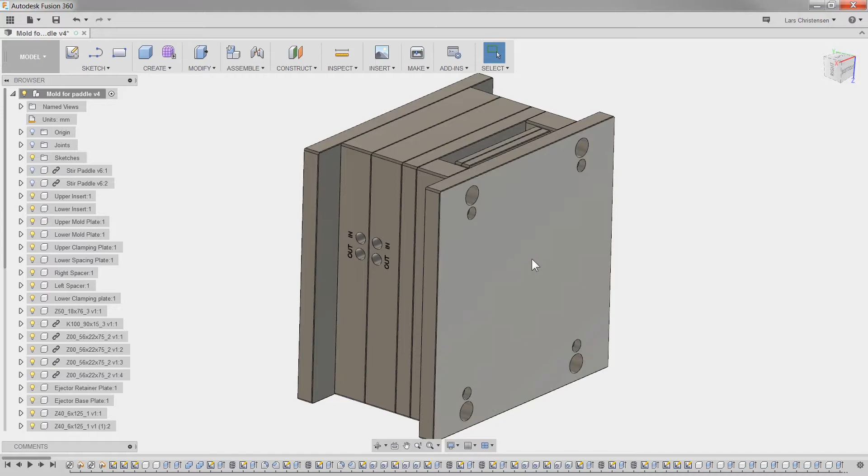And what we have to do now is we have to add the rest of the hardware. Like I said, most of the stuff that I'm using is from Hasco. And then in the end, we also got to get the assembly put together so it can open, close, and we can get the injection plate to kind of go forward and things like that. We're going to have a hole going through the center. So here you can see there's a space here.

So we're going to put a couple of feet in the back here. In Danish, they're called cat paws. And we're going to place those. And then we're going to place the hardware from McMaster-Carr. See, I'm in perspective with auto. Looks weird. And then we're going to place the cat feet, and then we're going to place all the hardware, and then we are going to create the actual movement we need in here. So let's put the cat paws in here.

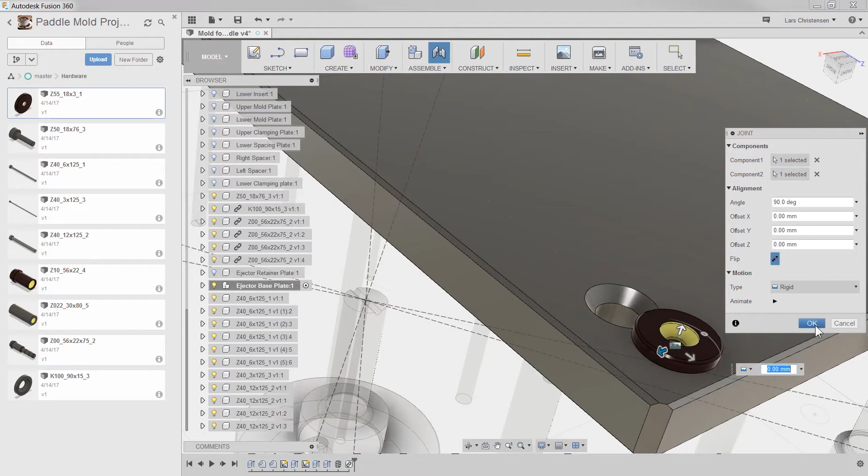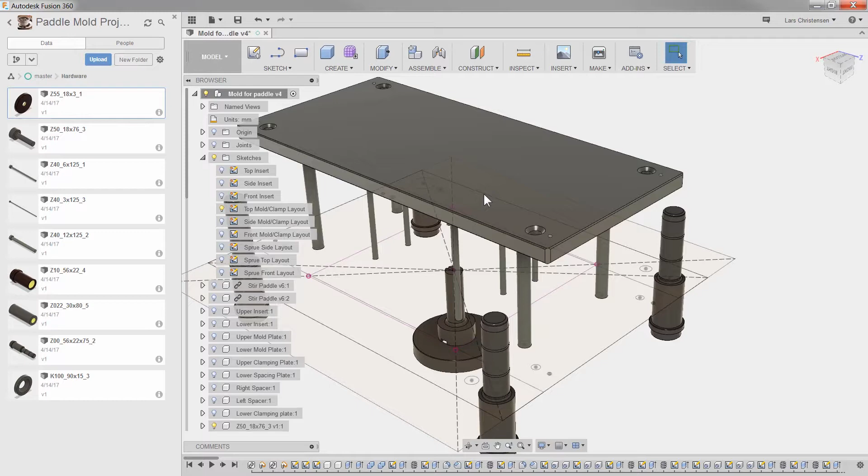Oh, see, I don't like how that is overlapping there. We're going to have to move that over a little bit. Oh, and I did it right into this one too. So that's not good enough. I'm still going to place them all to make my point here. So I'm going to go out, make that active, and insert into current design. And so here's my point: how easily we can move everything.

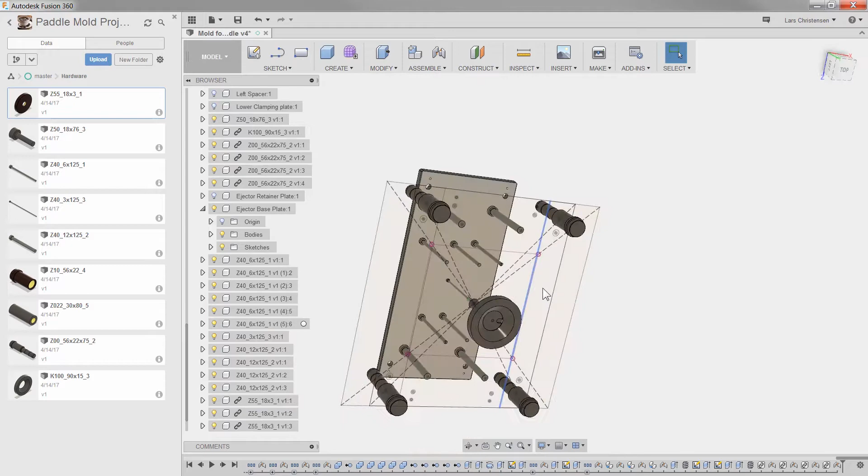So I thought it was a great idea to make these vertical and didn't take into account that these mouse or cat feet, as we call them in Denmark, would be so big in diameter. That's all right. Okay, so clearly this is not what I want. I'm going to move them in a little bit. So we can literally go over to our top plate, go in and say edit sketch. And I decided to make a relationship between these 2 points. So I'm going to abandon that idea. And then I'm going to place a dimension instead.

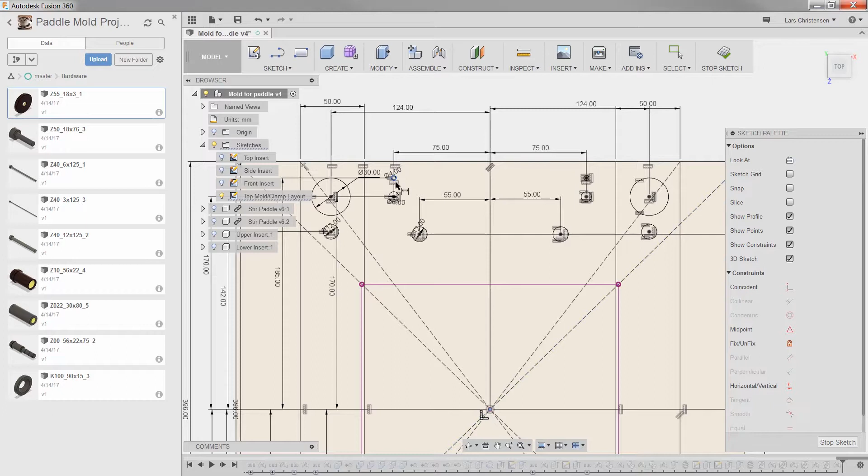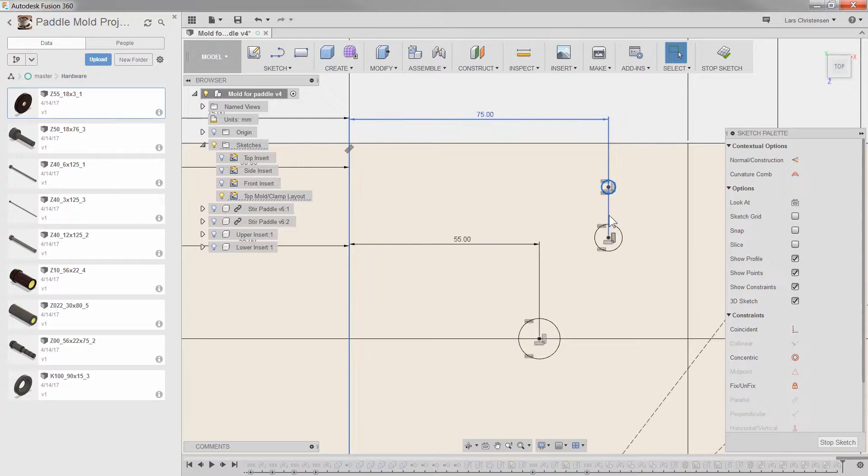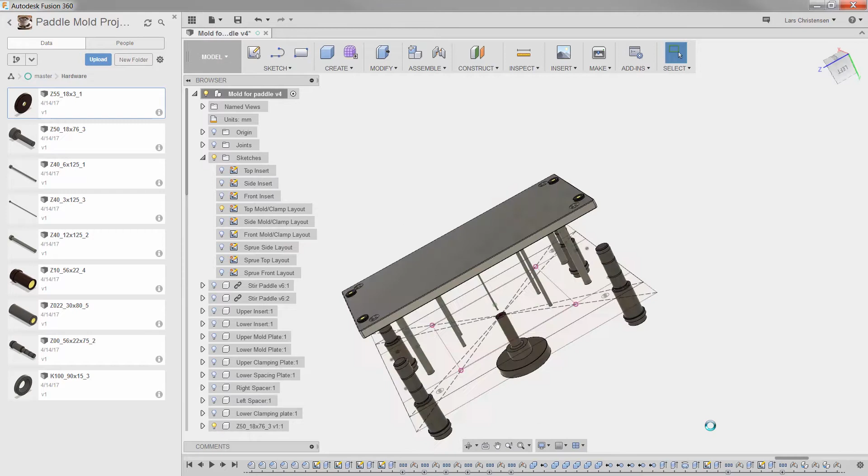So we should place that below. Do the right thing. Let's do it. What does 65 look like? That still might not be good. 60. I like 60. So now I'm just gonna have to go in and kind of fix. Double flag, hit OK. Everything's going to calculate. And if we did it right, now when we go and look at this, we should have moved these over here. So I really hope that this makes a lot of sense.

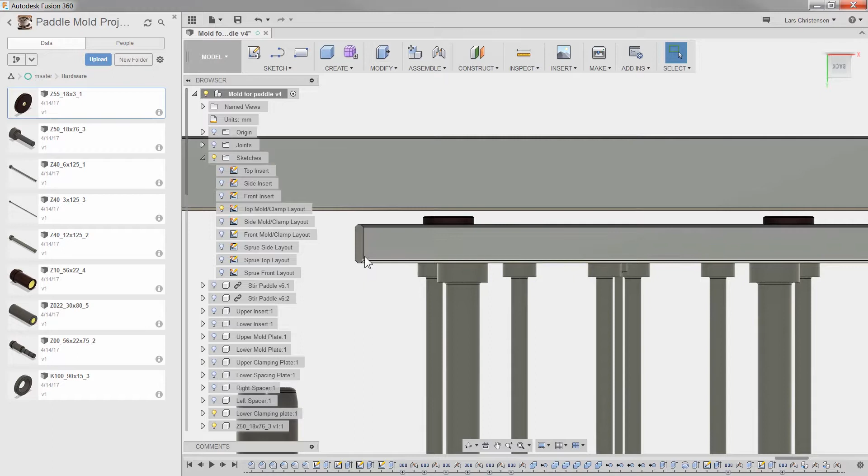Now I want to show another thing that I kind of did on purpose when I created this. If we actually turn on our lower clamping plate, on purpose I actually made a 5mm space here, but when I went out and got these, I call them cat paws in Danish, I don't really know what the name is, they're actually only 3, which means that I actually want to move this whole ejection down by 2. You could also make the plate thicker, I guess. There's a couple of different options, but this is a typical layout.

If we go in and we look at the front view again here, from the front sketch, let me go ahead and edit the sketch. When I drew this ejection up, I actually made it at 5 instead of 3, because that's what the cat feet are. So if I go ahead and change this to 3, you say to yourself, well, what happened? Well, everything stayed in here now. So let's hit stop. Now change that to 3.

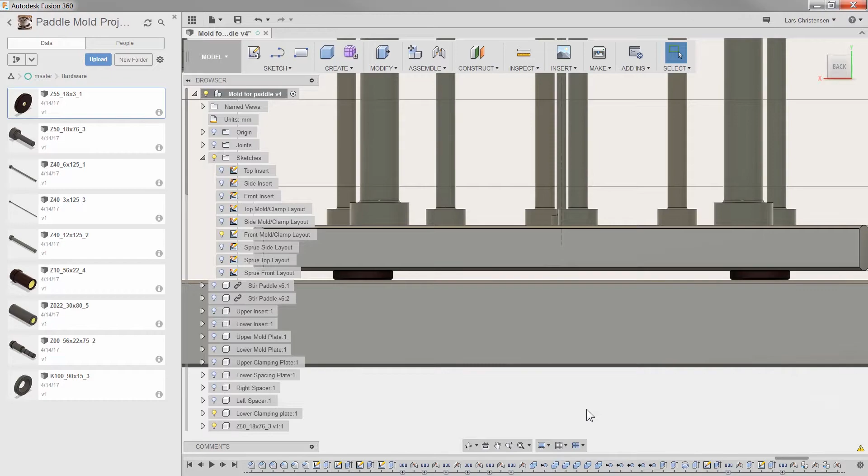And what did that do to everything we have in here? Well, this looks good, but if you just saw down here, we get a warning. There's 2 extrusion features that have failed, right? And this can easily happen. Well, if I choose that this is what I want, I now need to go in and try to solve

some errors in here. Now, what I'm going to do right now is I am just going to go in and make sure that I hide everything here that is not really needed right now. Okay. So we have the backing plate. We have the lower clamping plate. Now, I'm going to turn on the retainer plate. There shouldn't be any errors in there.

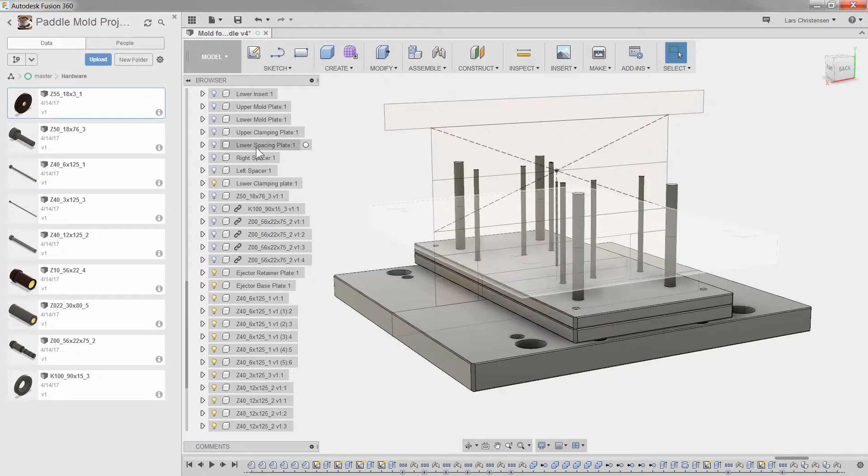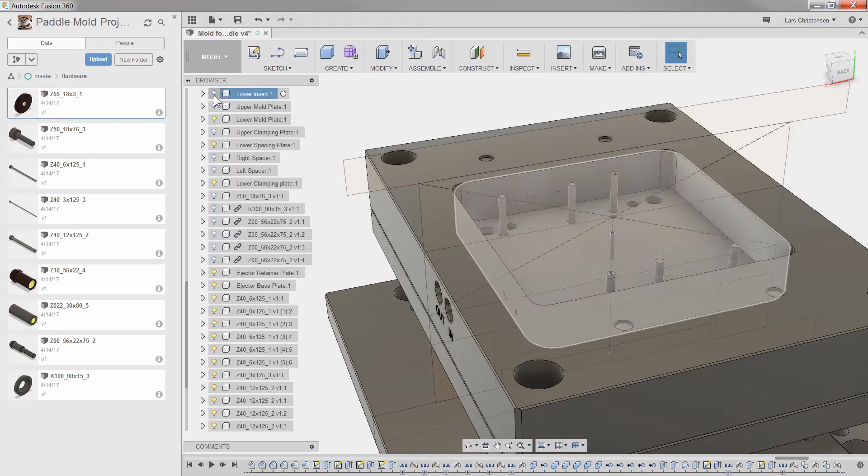Then if we're moving up, we have the lower spacing plate. There shouldn't really be any errors in there either. What happens when we go up to the lower mold plate? Well, here we do have an issue because we moved everything down another 2mm, right? And if we turn on the lower insert, well, that actually stayed. So what moved was the ones we did the direct edit on.

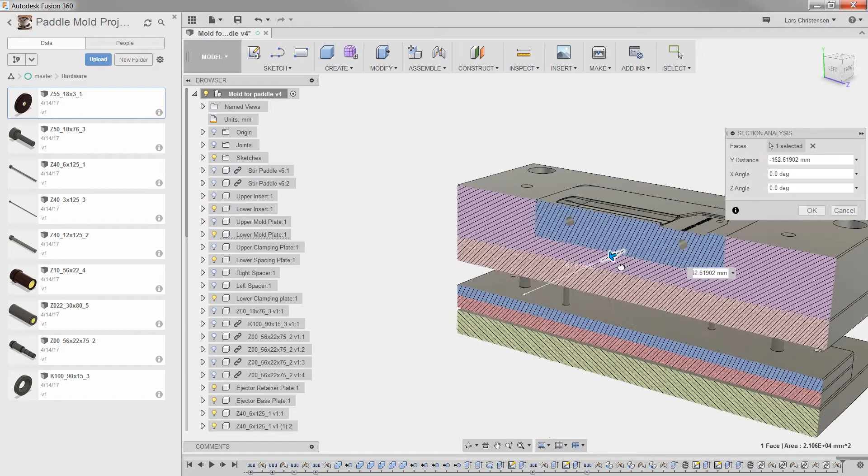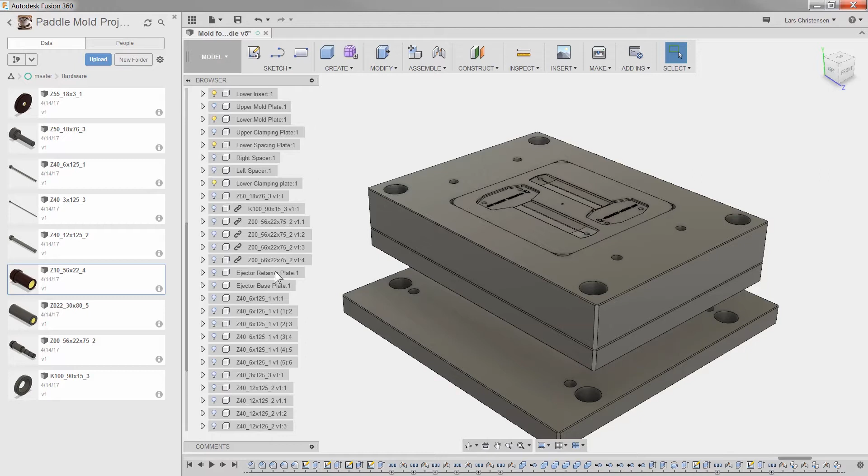Now the last 2 components I'm going to add to this one before I start adding hardware are these bushings and these here. So let's start out by adding these into the design. So I am just going to go ahead and hide all these components here, the lower, and there we go. So we've got to insert these bushings. Insert these into current design.

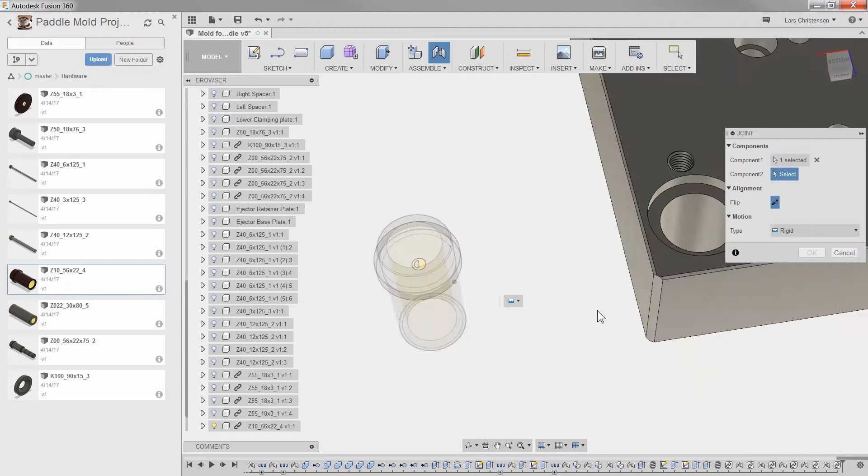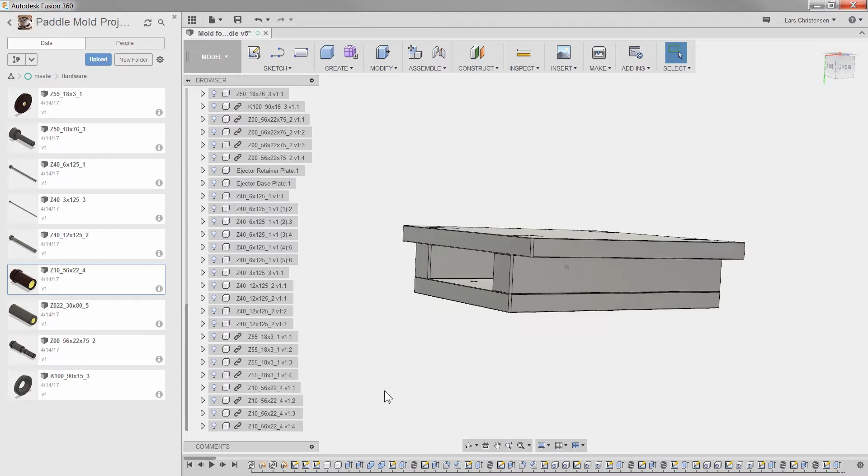So there are those. And again, they will also guide the lower spacing plate right there. And then to guide the right and the left spacer, oh, we never got the holes through the right and the left spacer. So to put the last spacers in here, we're going to use these here. So we're going to insert these.

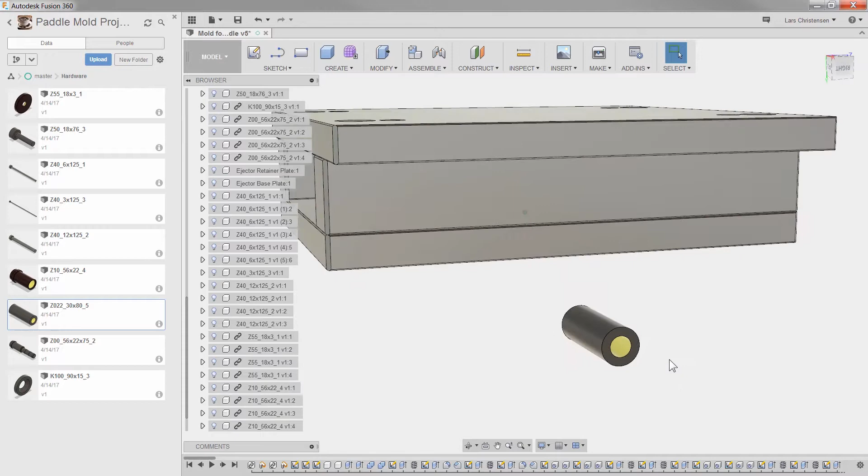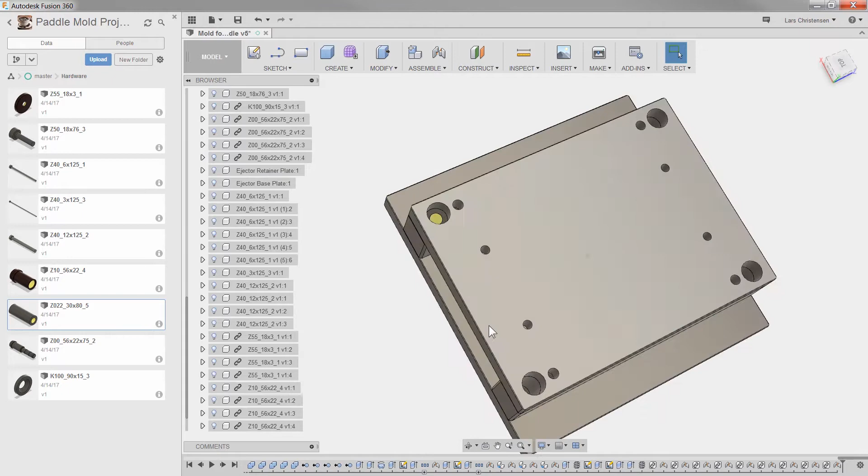These bushings here. I'm just going to place these down. -8. Like that. So they go through this. They should attach right here. Right, so they go right through the edge, through these two plates, and then they go into the lower spacing plates.

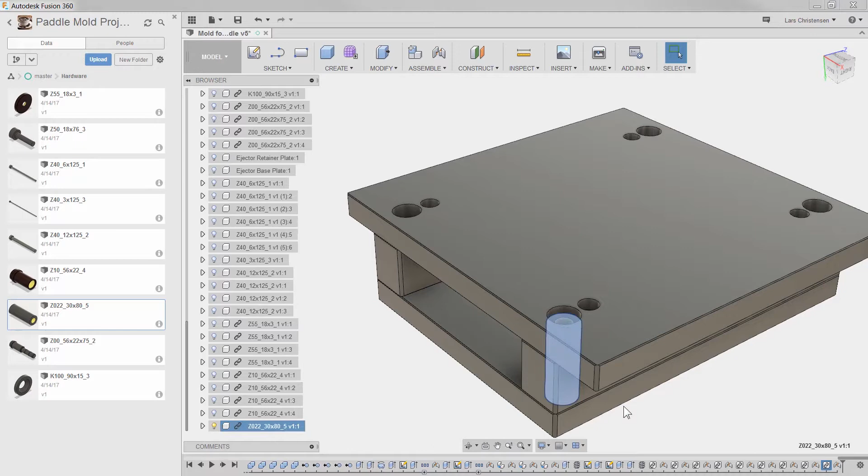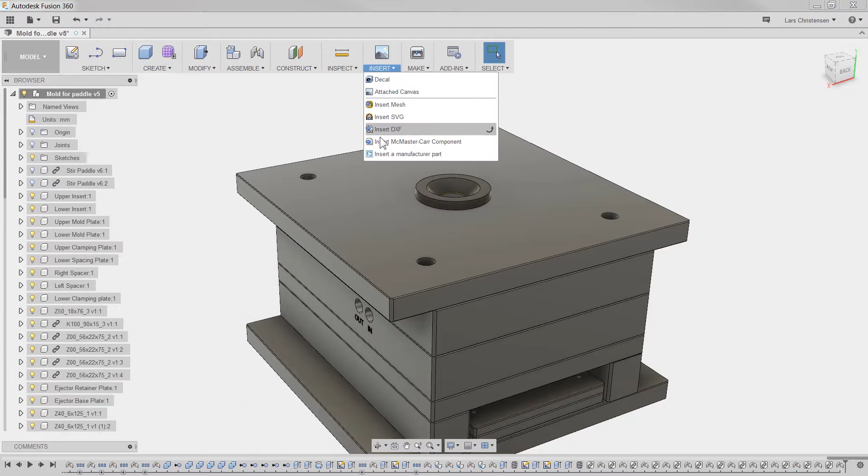So the last thing we're going to do is the hardware, and here I am going to use the McMaster-Carr hardware. It's very easy to do. Go to insert McMaster-Carr, and you get the catalog, and I'm going to say socket head cap screw. It's going to be metric. What is your diameter? Mine are 12, and the first length I'm going to go for here is 45.

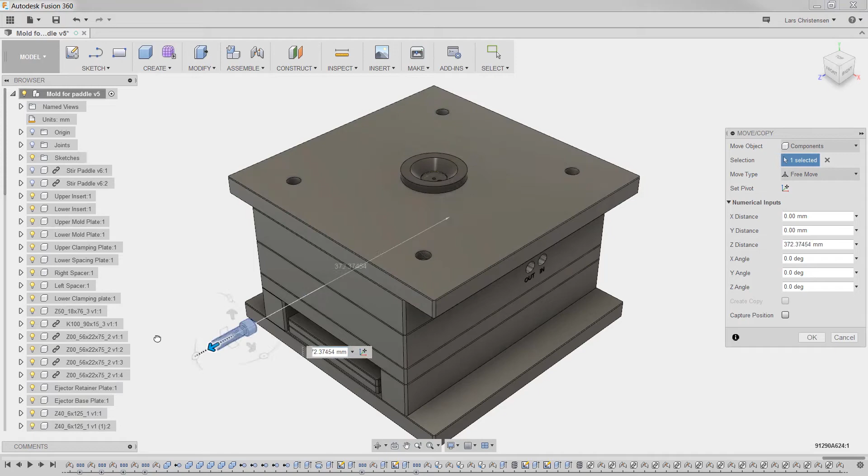Right there. You can actually make this window a little bit bigger. Click on the part number and click product details. And then if you scroll down, you can choose all different kinds of formats. I normally pick the step file right here. Hit save. And that screw is going to be brought right into your component, just like if it was an outside component. And now we can go ahead and do the same thing as we've been doing all along to place these.

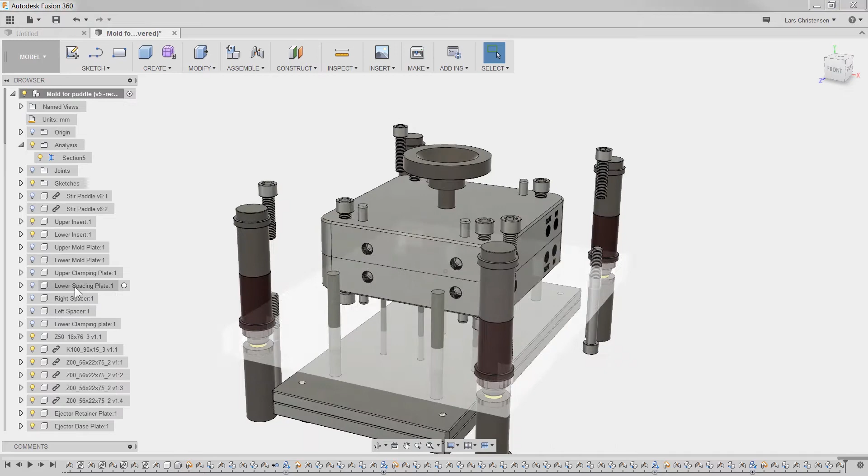Now look at this. This is not good. So what we can see here when I did my section analysis is that one of my ejector pins actually cuts right through the mold. So we're going to have to either move the ejector pin or move the coolant channel. Now the easiest thing is probably to move this coolant channel over here on this side.

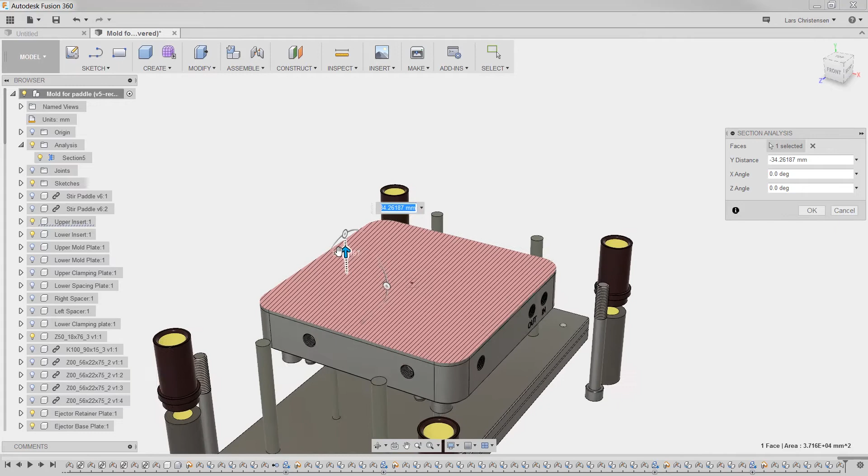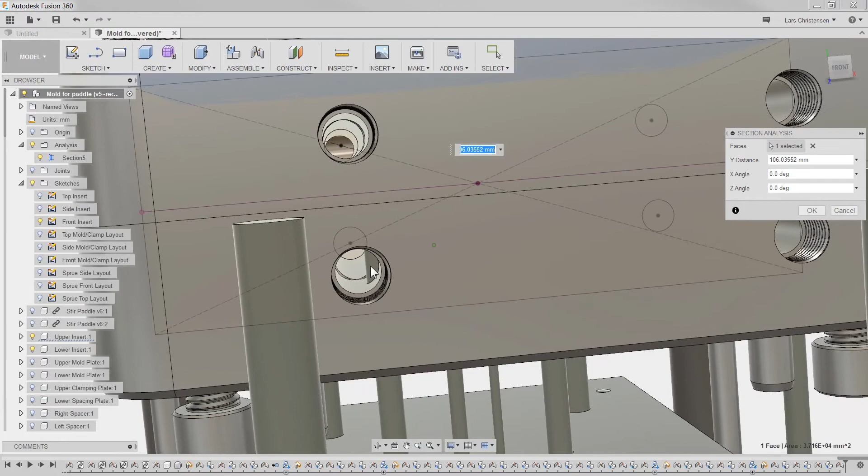So I'm just going to hover over here and see that if I go into my sketches, and this would be our front insert, we have these coolant lines sitting over here, and we can see the ejector pin is actually cutting right through there. That's not good, right? So let's go into our insert sketch. We'll get out of the section analysis. Go to our front insert sketch, edit the sketch.

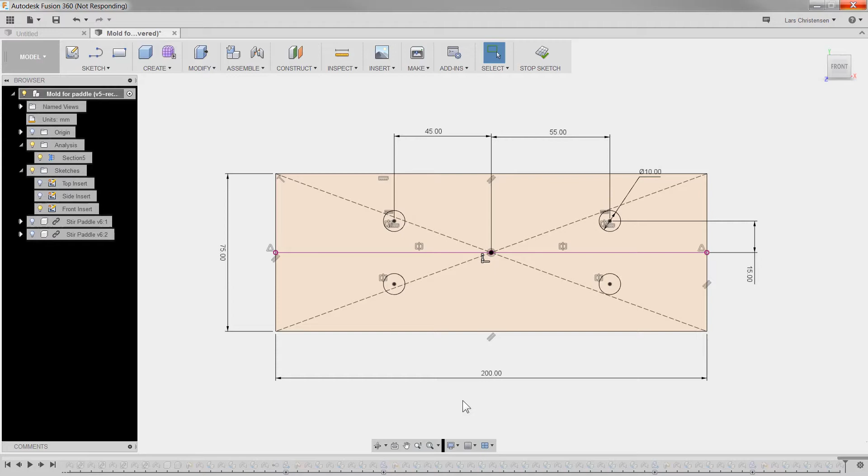And I think what I'm going to do is try to move this one over just 5 millimeters and see how it looks then. Stop sketch. We're going to do all our calculations. And I do another section analysis,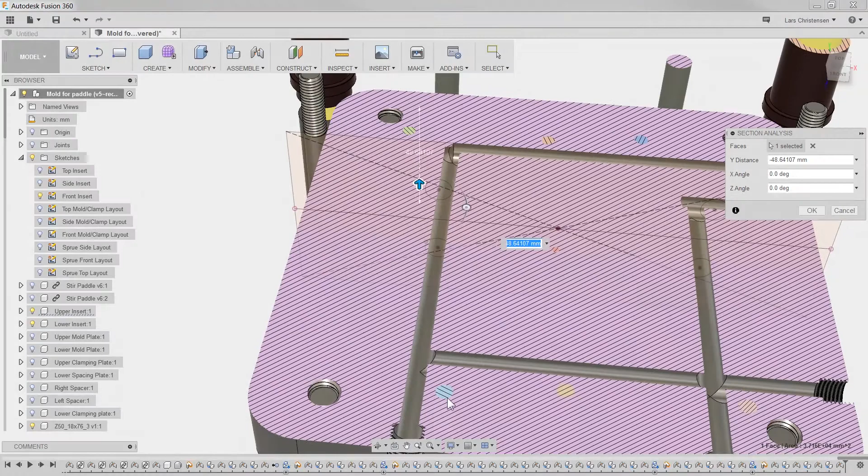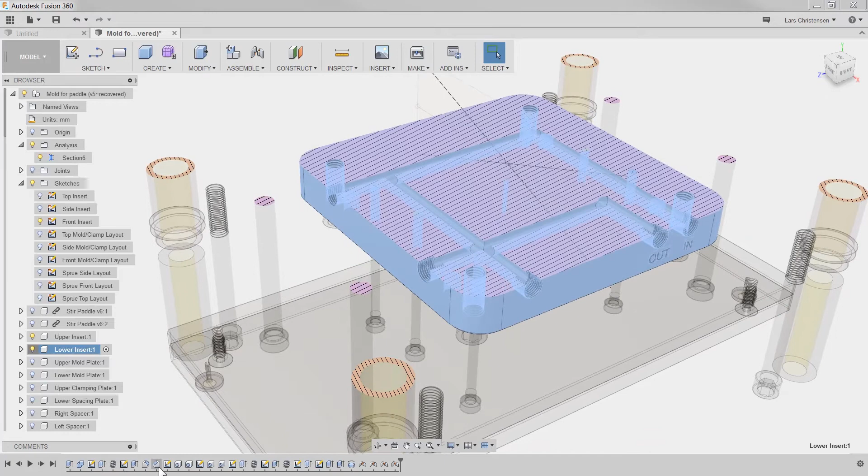it looks like we're now clear of the ejector pin, but it might mean that this hole here should be a little bit deeper on that lower insert right here. So if we go into that one and make it active, we can find that hole, right? By clicking in here, we can see that it is these holes here. So I'm going to edit that. And I'm going to make the depth 150.

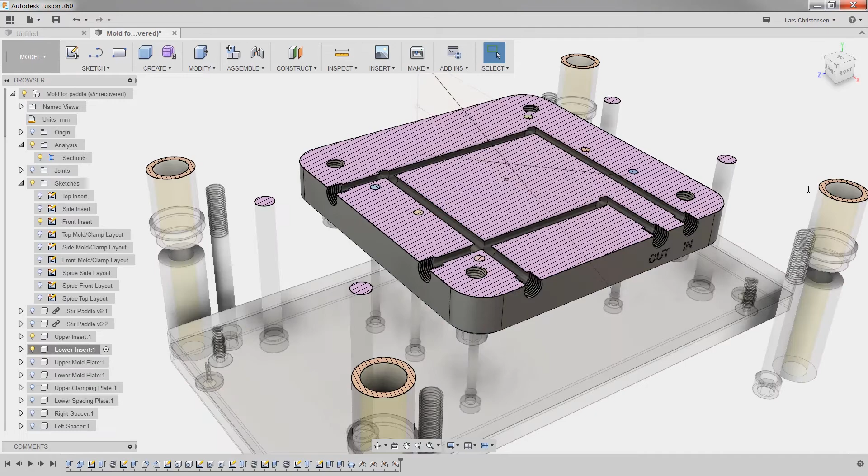And let the software do its calculations. And now we're making sure that these go down here and that the locating pins are not touching our coolant holes. So I hope that this is helpful in regards to using this section analysis tool to troubleshoot through here and making sure that we're not hitting anything.

Now there's a couple more things I just wanted to show you quickly here, so I'm turning everything back on. And one of them is the selection tools we can create in here. I didn't use this when I was working with this model. It could make life a lot easier when you start creating them. What we can do is actually create selection sets.

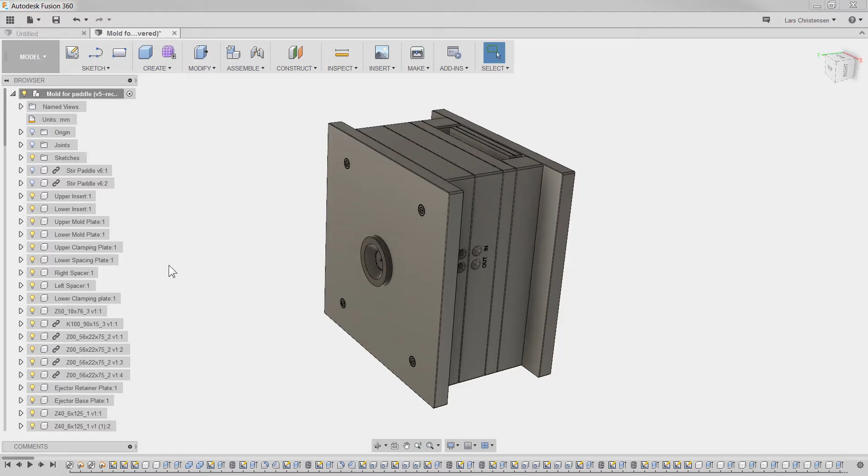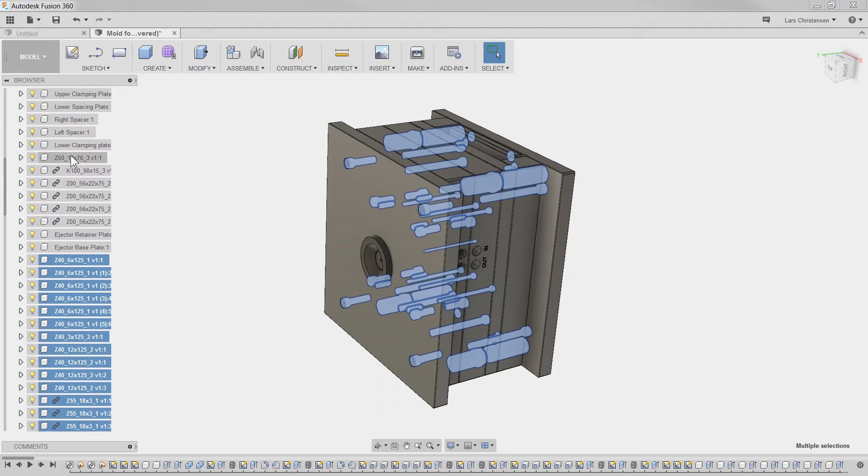And what selection sets means is that we can take all the hardware, for example. If I select all this hardware here, and then we have these retainers and everything else, let's do all this, and down to the bottom is all hardware. And then also these 4 pieces here. And if I right click, I can say create selection set.

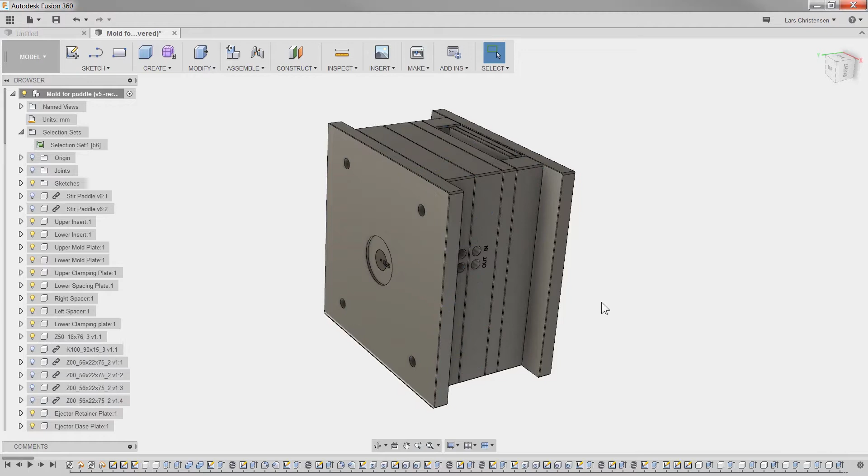And when I do that, up at the top I now have a folder called selection sets, and I can now click right here and select it all, and now I can hit V, and I have now hidden all the hardware in here. I can also go over here and turn them all on again.

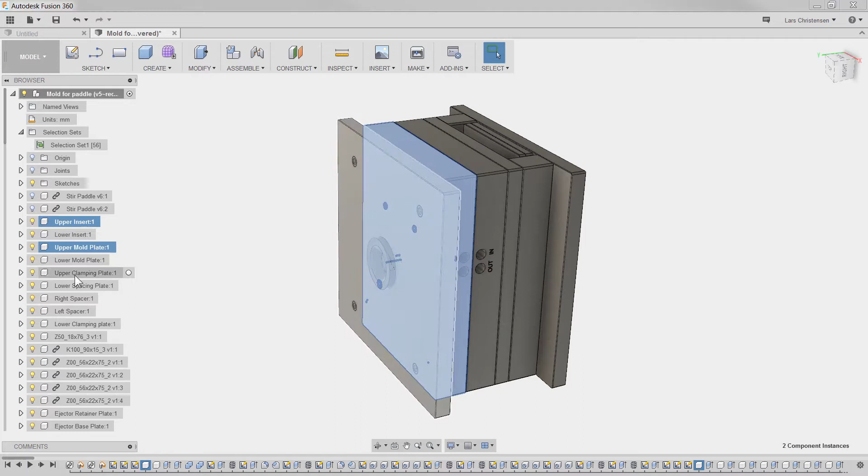And then you could also do something like creating an upper and a lower half, for example. So if I turn on the upper insert, the upper mold plate, and the upper clamping plate, I can right click on those and say create selection set. So now this will be created, and you can rename these. So I can call this upper.

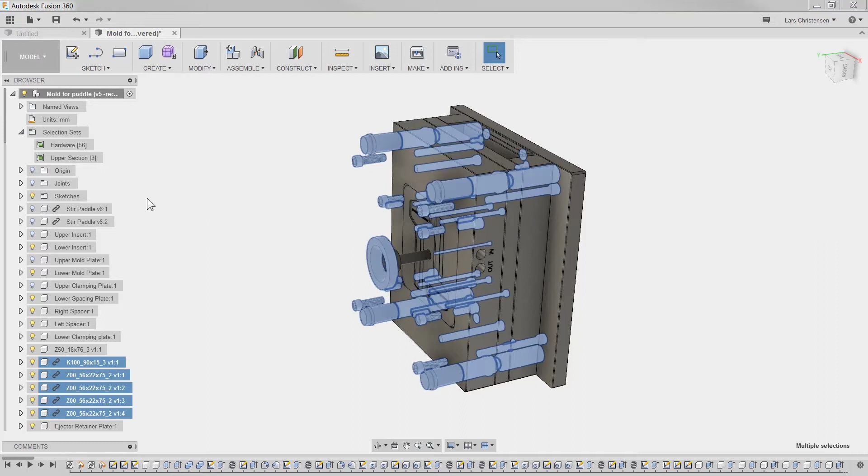And we'll call this hardware. So now I can select all these, and I could now hide them or unhide them depending on what I want to use. Oh, I didn't include one component in there. So that selection set can be handy. It's not something that I'm using that much, as you saw, but I wanted to show you this.

Now the next thing that is very important to talk a little bit about is that right now everything is still moving around. All these components have not been nailed down in space, and I'm waiting to do this to the end actually. So definitely watch my assembly video if you want to get all this nailed down. I'm gonna make one component ground.

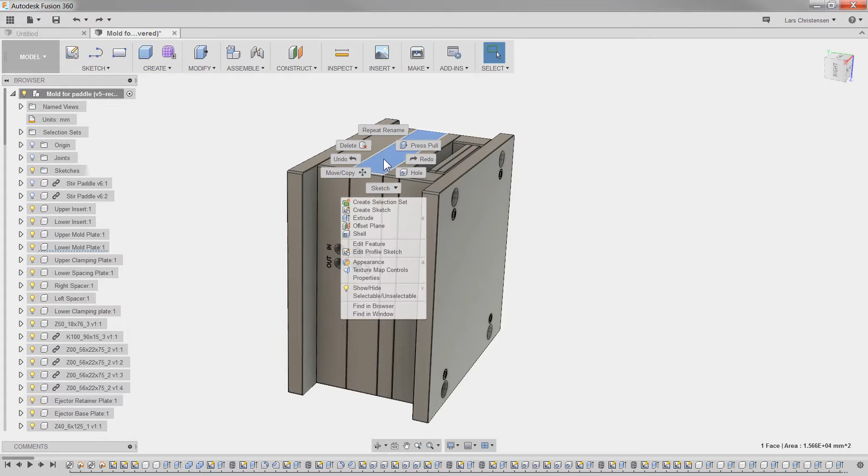I'm actually gonna choose to make this component here the ground component. So that will be my lower mold plate. I'm gonna right click and ground that one. Then I'm gonna go back to the upper and create a selection set for the upper one.

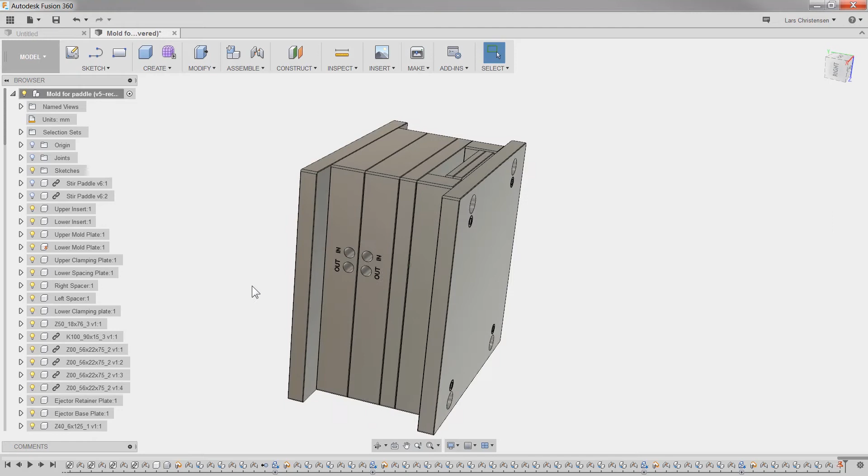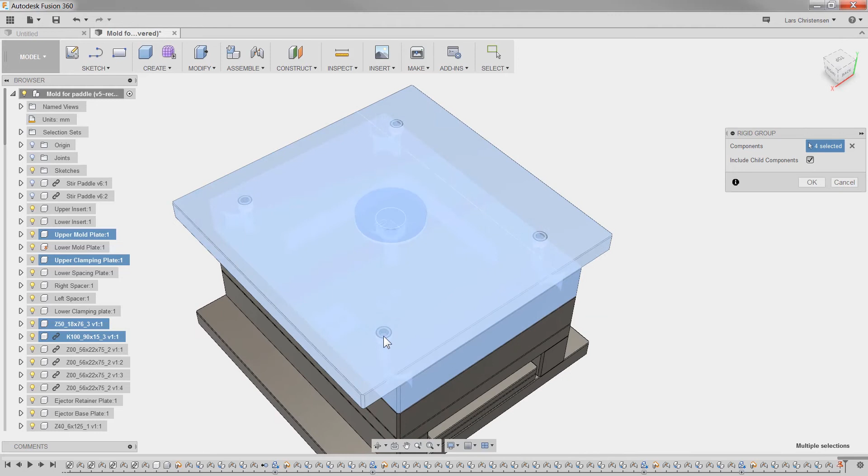Now I can go in here to assemble and say rigid group, and I'm gonna now group all the components together that are in our upper selection. And that is also going to include the upper insert, and it should also include all the children.

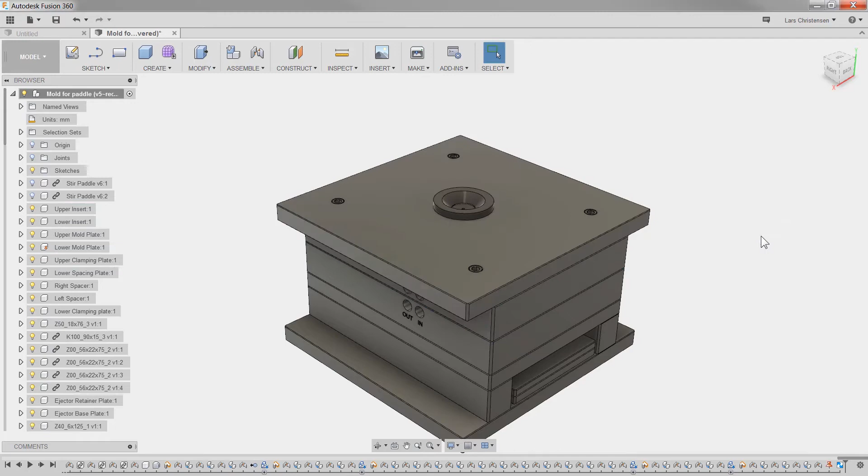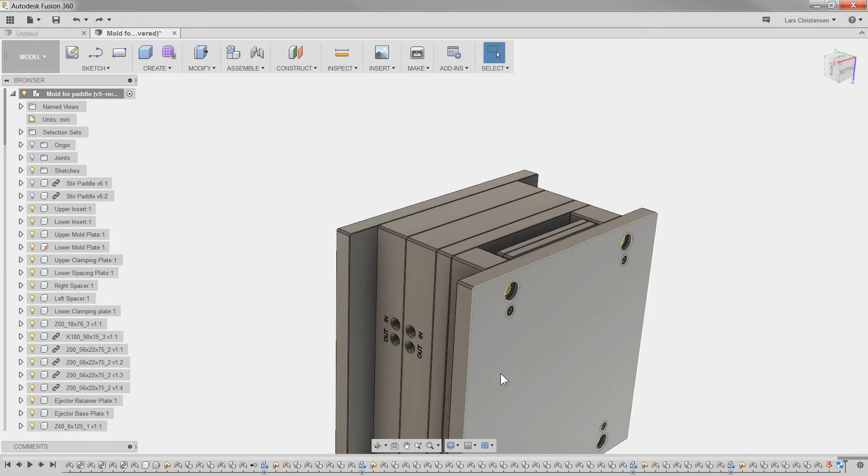So now that means that this can move together like this. All this can now move around like this. I'm going to go Ctrl+Z to get it back. So what I want to do is create a relationship between the ground component and this one,

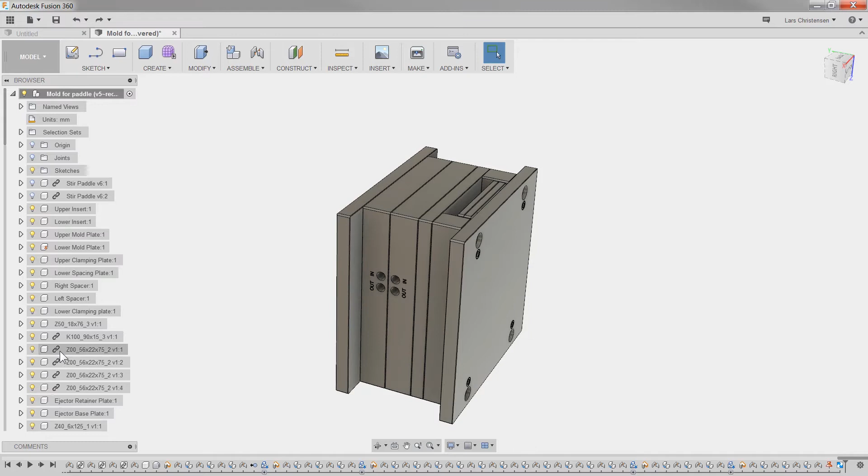so we get the relationship we want. So I'm going to bring it back in where it was, and I'm actually just going to cheat here by turning off the lower clamping plate. I'm going to turn off the spacer and this one right here.

I'm going to use the command called as-built joint. Watch some of my other content to put this all together; I'm not going to explain it all here. I'll take the pin and select it as a component, then select this bushing that belongs to the other part, and make a slider relationship between the two.

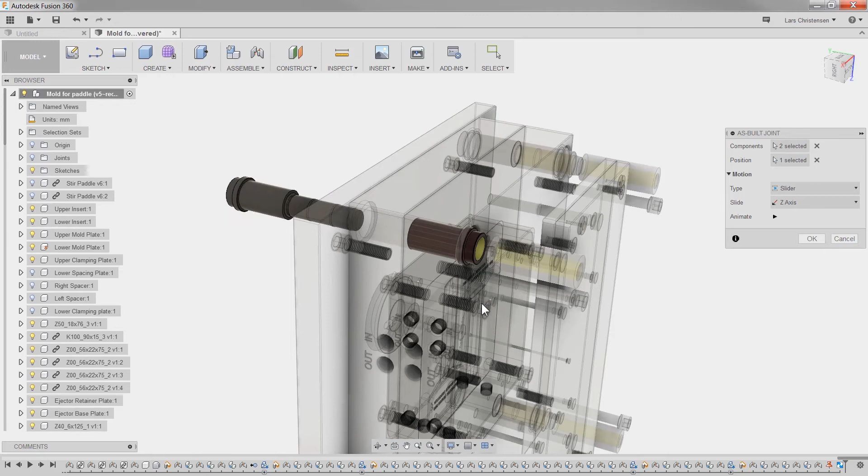So now you can actually slide back and forth like this. I'm going to hit OK. So now we have the sliding action of the upper part between these two.

Now I can go over to that joint and find it down here in the bottom. That is that sliding joint right there. If I right click on it, I can say edit joint limit. Now I can say the minimum is 0, and the maximum I want it to move is, just making a number, 100 millimeters.

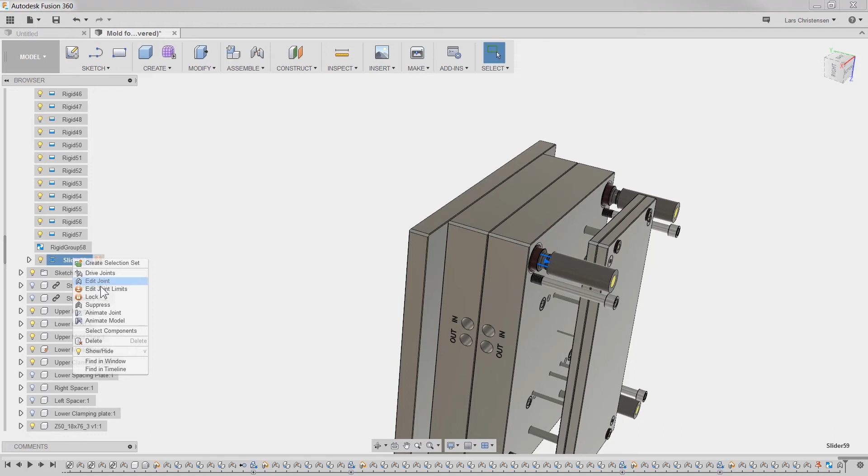So now this thing will move like this. That is good. Now we need to select and make a rigid group for the remaining components.

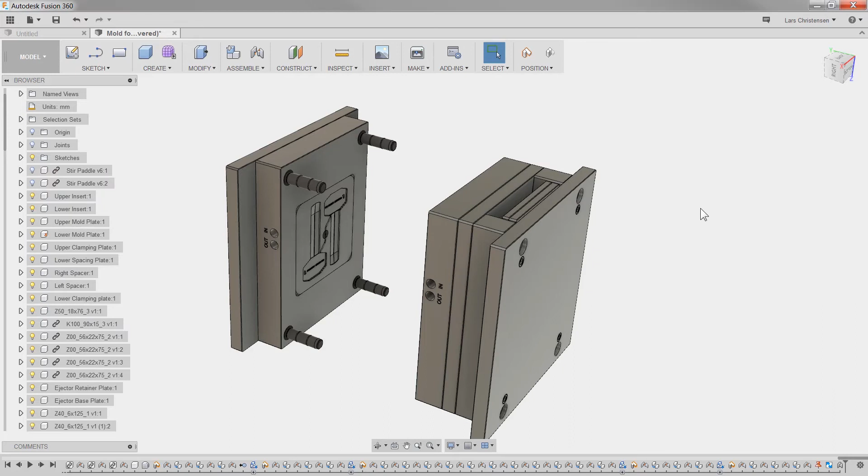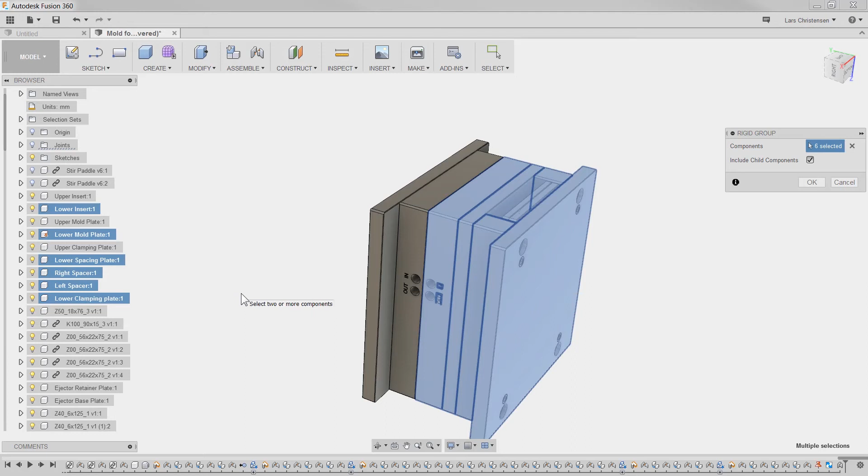The remaining components are going to be the lower insert, the lower spacing plate, the right and left spacer, and the clamping plate. They are all going to be grouped with all their child components. Then the last one we need to do is the ejector plate.

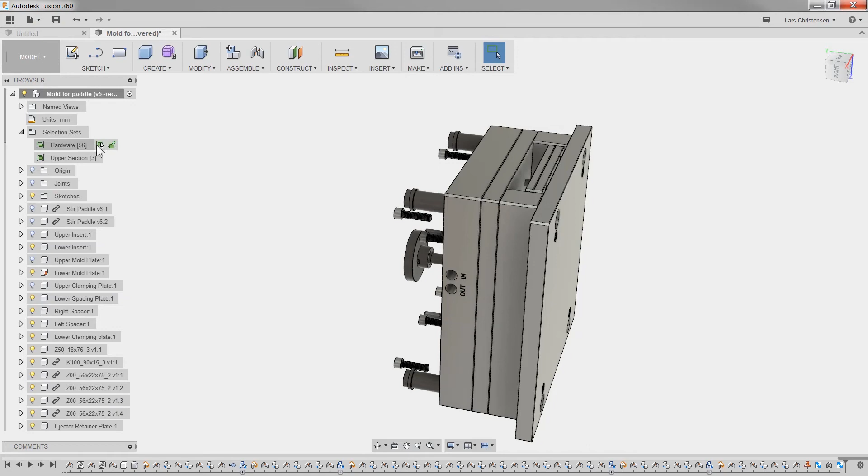I'm just going to hide the upper section here for a second, and hide all the hardware. They should follow along, I think. Then we're going to create a rigid group between this and all its children.

Then we're going to measure from here to here. That's 27. So then we're going to create an as-built joint, select this component and this component, and select the position to be through there. Hit OK, go over to that joint.

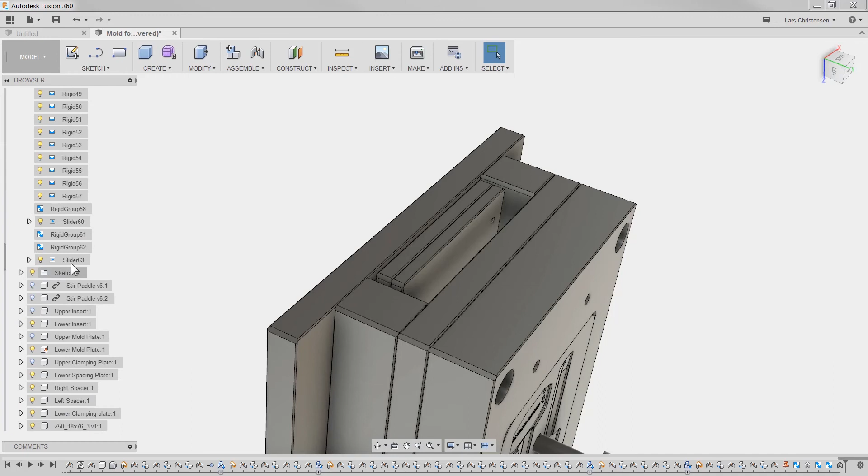There's a lot of joints. By now, edit joint limit. Minimum and maximum is going to be 27. Hit OK. So now that can move back and forth 27.

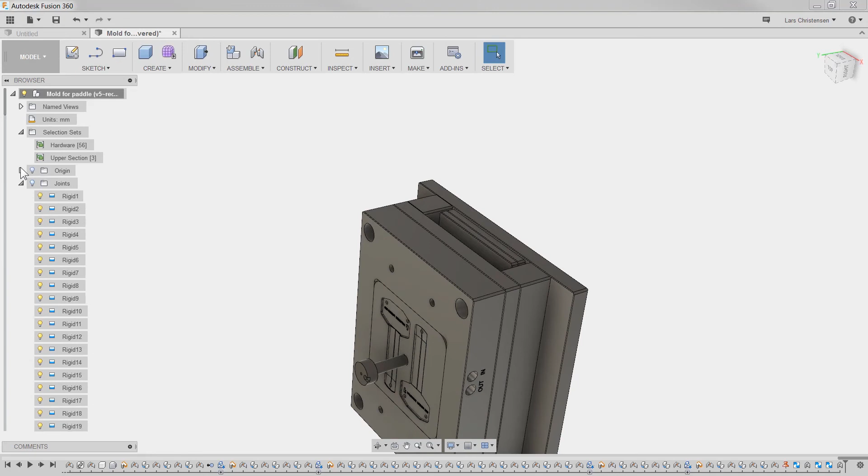Let's get all our hardware back on. Oops, so you've got to select it, hit V for display, then we can see all the hardware. And there are the ejector pins coming in and out.

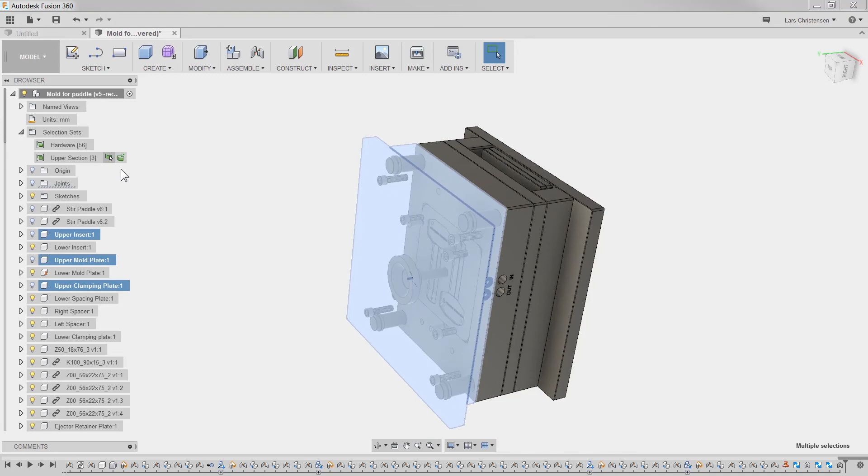If we also take the upper one and make that visible, now we should be able to grab the back end, drag that out 300, and now grab the plate and push that out. Then when this one closes again, it's going to hit these 4 pins, and that's going to push everything back in.

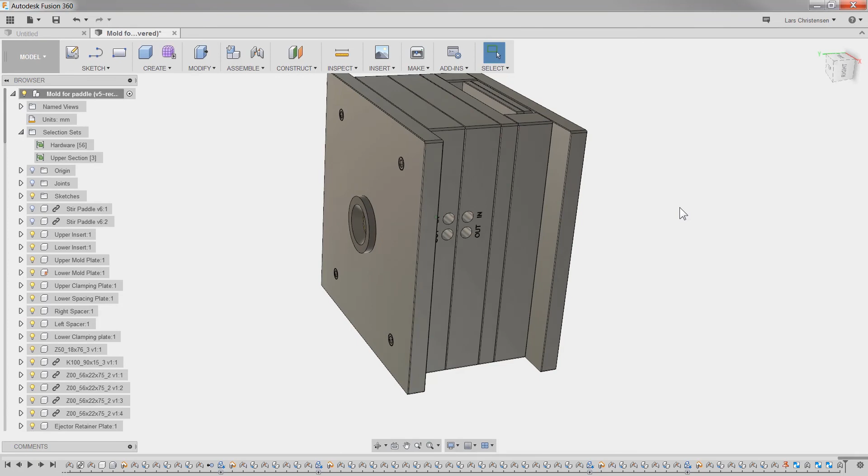The last thing we're missing here is the rod in the back end of it. This is normally a bushing rod that pushes the thing back and forth. I'm going to leave that one out here. I think I'm done with this mold. I'm going to hit save and put in here 'finished mold'.